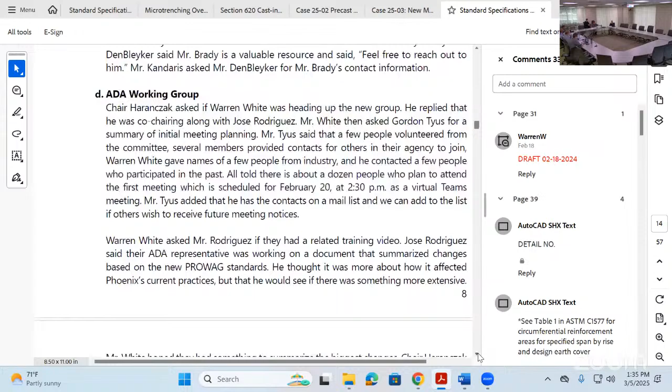All right, do we have any comments from the committee members regarding meeting minutes or any questions? All right, hearing none, I'll entertain a motion to approve the meeting minutes as written. Mr. Chairman, this is Dan Nissen with City of Peoria, and I make a motion to approve the meeting minutes as written. Thank you, Dan, I appreciate that. Can I get a second motion? I'll second the motion. Thank you, Ryan. We have 2 motions. We'll move into a roll call vote.

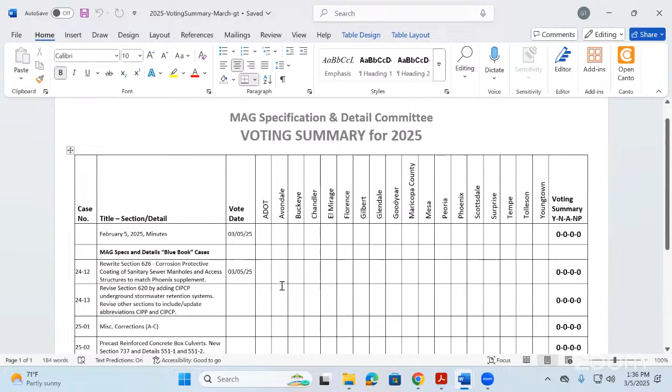Thank you, Chair. Let's go down the line, starting with ADOT. This is Mike Blaker, good afternoon, ADOT present. How do you vote on the minutes? Yes. Avondale? Jimmy, you there yet? Buckeye? Good afternoon, this is Josh Ford, yes. Chandler? Yes. El Mirage? Yes. Thank you, Florence?

Doesn't look like Florence is present. Gilbert? Yes. Glendale? Yes. Goodyear? Maricopa County? Yes. Mesa? Yes. Peoria? Yes. Phoenix? Yes. Thank you, Scottsdale? This is Roy Harrington, yes. Surprise, yes. Tempe, Tolleson, and Youngtown. Is there anyone on who I didn't call or came on later? If not, the motion passes unanimously. Thank you, Gordon.

All right, we're going to move right into items proposed to be heard, cases under consideration. This case carried forward from 2024, case 24-12, revised section 626, corrosion protective coating of sanitary sewer manholes and access structures. This one's brought to us from Phoenix, Matthew was heading this up. Matthew, last I recall, we were going to polish up this last draft, there were a couple minor little changes.

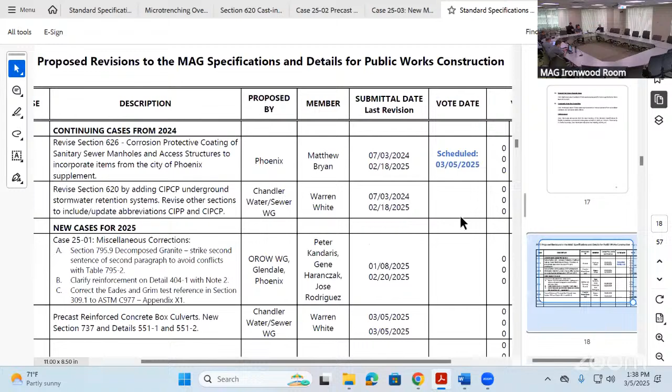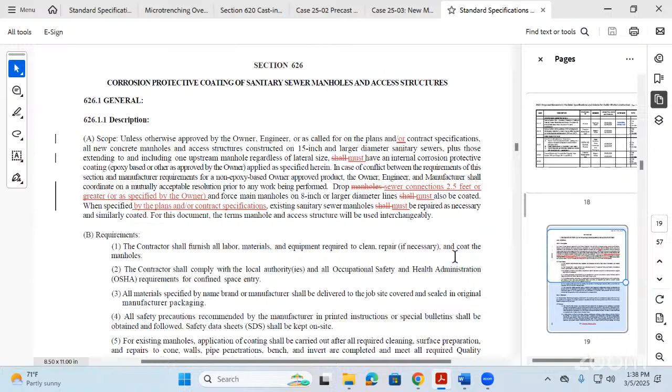I know before you get started, Matthew, I distributed this to my colleagues, and I didn't receive any opposition to it or any negative feedback. So with that, Matthew, can you provide us a quick update on any changes that were made? Good afternoon, Mr. Chairman, we have no changes on our end. I think we're ready to move forward. Okay, so we have the polished, final version ready to put up for vote.

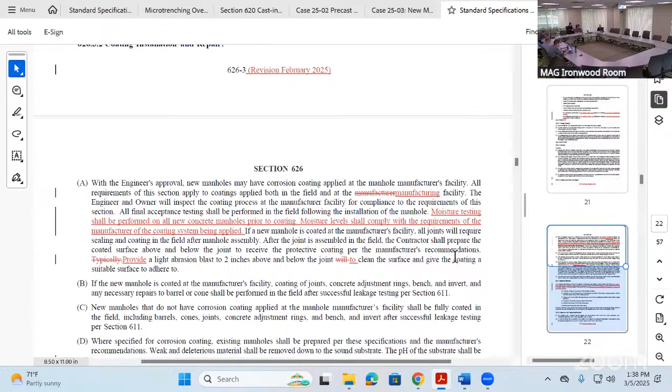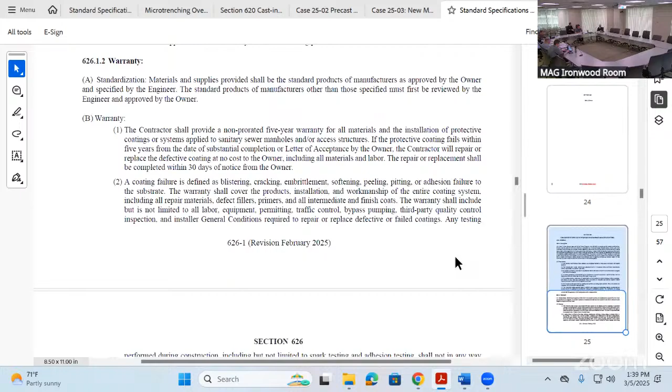That is correct. So with that, is there any committee members that have any questions or comments regarding this case? No questions, not even a good job comment? Well, Matthew, you guys did a great job. City of Phoenix did a great job pulling the resources together and revising this section. I appreciate it. Thank you, comments, Mr. Chairman, you're welcome.

With no comments or questions from the committee members, at this point I'll entertain a motion. This is up for action, so I'll entertain a motion, and Matthew, you're more than welcome to motion for approval.

Do you want me to second that, Mr. Chairman? Well, we don't have a first yet, but since it's your case and you support it, if you want a motion for approval, you're more than welcome to. I'll motion for approval, Mr. Chairman. Thank you, Matthew. Can I get a second motion?

This is Warren, I'll second. Thank you, Warren, appreciate that. With that, we'll move into a vote.

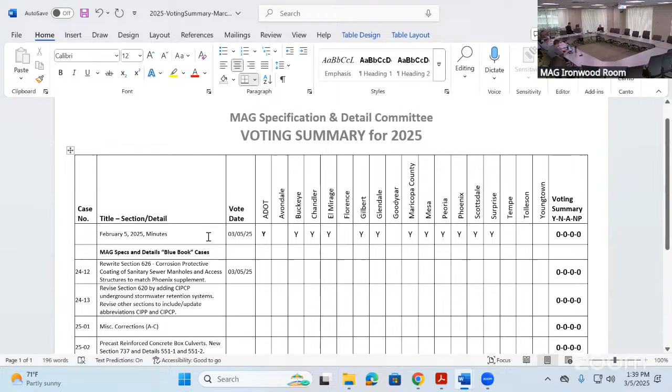Okay, this is case 24-12. Starting with ADOT, yes. Avondale. Buckeye, yes. Was that Buckeye? Yes, that was. Yes. Chandler, yes. El Mirage, yes. Florence. Gilbert, yes. Glendale, yes. Goodyear, Maricopa County, yes. Mesa, yes. Peoria, yes. Phoenix, yes. Scottsdale, yes. Surprise, yes. Thank you. Tempe, Tolleson, Youngtown.

Motion passes unanimously. Thank you, Gordon. Thank everybody. I thank City of Phoenix again for their work and the resources they pulled together. I thank all the committee members that reviewed it and had comments to provide. Once again, this committee is made up of all of us, so I appreciate your guys' input. We'll move into agenda item number 5.

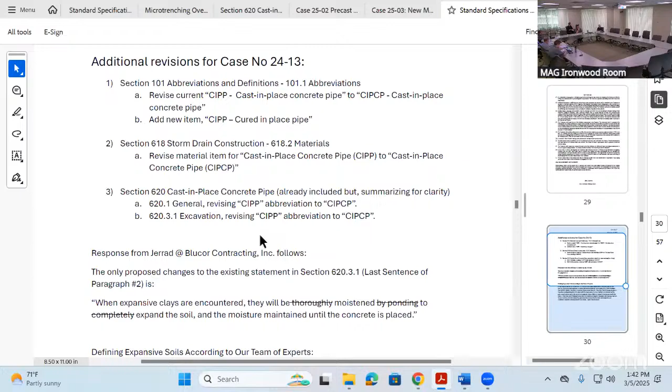It was all really about how best to handle that section regarding excavation and what to do with those expansive soils in that paragraph we've been talking about. So I think we are close in what we've come up with for that additional section, and that's not the latest, we might want to pull up the one on your link on the right. Yeah.

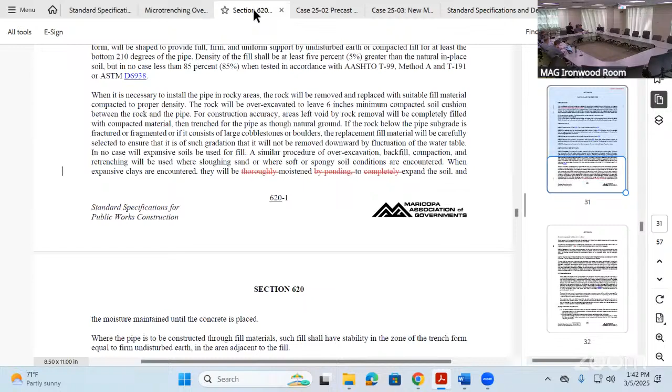So in all cases, we've added that section, or in the first section, general, a geotech investigation is required, for pretty much all cases, to properly assess the soil conditions. So that sets the stage for what to do if you do encounter different types of soil conditions during excavation. So that's new, that one statement where Gordon is showing there.

And then further down, we pretty much removed that sentence regarding wetting the soil, which already occurs below during placement. You're going to want to keep the soil conditions adequately moistened during a concrete pour anyway, so that it doesn't get sucked out anyway. So that's already there, so that's struck. And then that new paragraph,

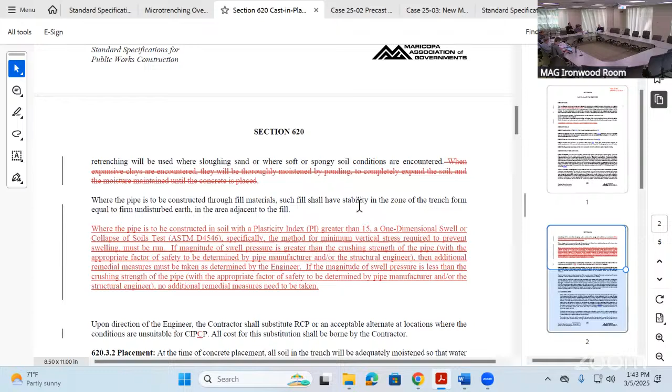being consistent with ASTM and the testing methods about the plasticity index, PI. In one case, if it's greater than 15, then you're going to do that one-dimensional swell test or collapse of soils. And since the ASTM has more than a couple different bullet points there, we've specified exactly what method: it's the minimum vertical stress required to prevent swelling that must be run.

And then if that magnitude of swell is greater than the crushing strength of the pipe, then again, with all the appropriate factors of safety determined by the pipe manufacturer and/or structural engineer, additional remedial measures must be taken, determined by the engineer. Now, that's not really a one-size-fits-all situation out there. So it was talked about whether we could have something as a default, but the feeling of the group was there is not really a one-size-fits-all.

Could be maybe they make a more robust pipe, could be a site-specific situation, maybe they go to RCP. So there's different scenarios there that the team felt like that's the appropriate measure, is then you get back to the engineer, and then they determine what's the best situation for that case. So that's where we're at now with this situation when we encounter the expansive soils.

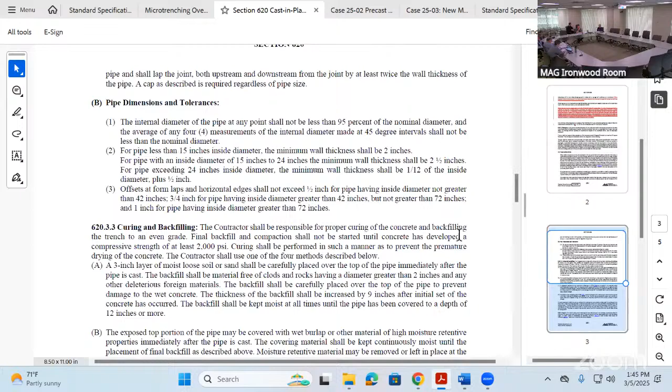Hoping we're close, but that's... Yeah, this was that last minute, the middle revision, so a lot of the committee members obviously hadn't had a chance to... Haven't had it, yeah. So we have opportunity to talk a little more again at the water and sewer. Great, yep, so we can see how close everyone feels.

So this will be brought up with the water and sewer working group again, and then I suggest any of the committee members that are not part of that working group to at least put eyes on this and run through it. Do we have any questions or comments from committee members? Yeah.

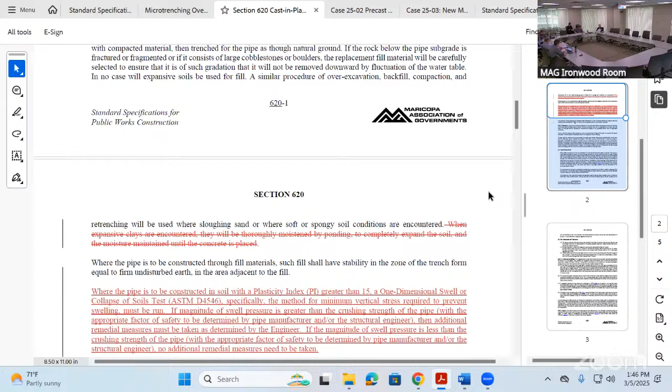Thanks, Mark. Most of the changes here are pretty simple with the abbreviations and acronyms. I'm curious in section 620.3.1, that second paragraph, what prompted the request to change that language? Has there been a certain problem we've identified that made us say we got to change this?

Not that we were aware of, because it's been in place. From last year's discussions, we had different situations where we thought, okay, if you do this, then you go back and excavate 6 to 8 inches and replace and compact. From what I'd heard from Blucor, they have really never done that, the ponding or other methods. So it seemed like that needed to be revisited, and we've had subsequent discussions and some different drafts. This is what has led to that new paragraph.

It seems like it's getting less prescriptive here—instead of saying do exactly this, it's just saying do something. I guess there's got to be a reason why we're implementing the change, and I'm still trying to understand that. Well, beforehand we didn't really specify—if you encounter expansive soils, it just says to do thorough moistening. But now we've given it more specifics: you do your soil testing, if your PI is greater than this, and you're working with the manufacturer and the engineer. So it's given some direction. It's not specific to what to do, because that has to be determined by the structural engineer.

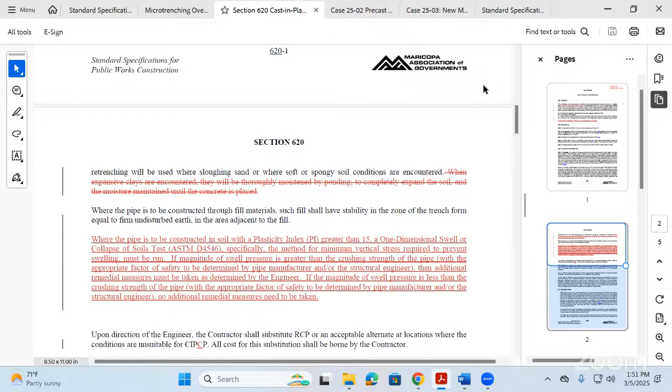Yeah, I think it's something worth looking into. Fair enough, I'll specify and see if we can at least say that, because I thought about that too. As I read it, I saw how the geotech had suggested that sentence. I was wondering about that too. All right, we'll talk more. Thank you, Jose. Any other questions or comments from the committee?

All right, we'll move into agenda item number 6. This is due cases for 2025. Right off the bat is the miscellaneous corrections, case 25-01. This will go all calendar year, and we'll vote on it at the end. There was a new addition for the Eades and Grim soil test.

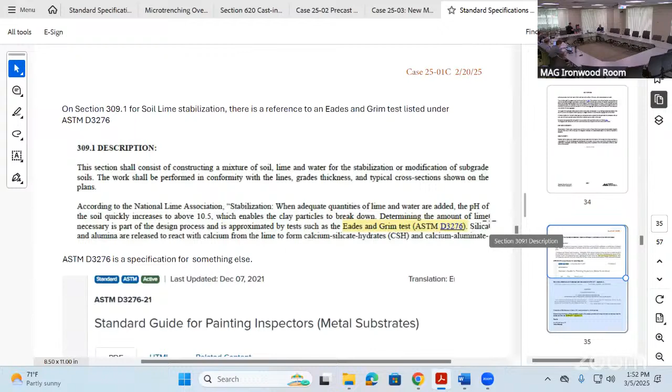I always thought this was a test for ratios of lime and soil for stabilization, but I haven't really dove into this one. I'm not the subject matter expert here. Do we know who brought this case? Warren, I believe this was Jose Brown. Jose, can you give us a little brief background on this Eades and Grim and the correction?

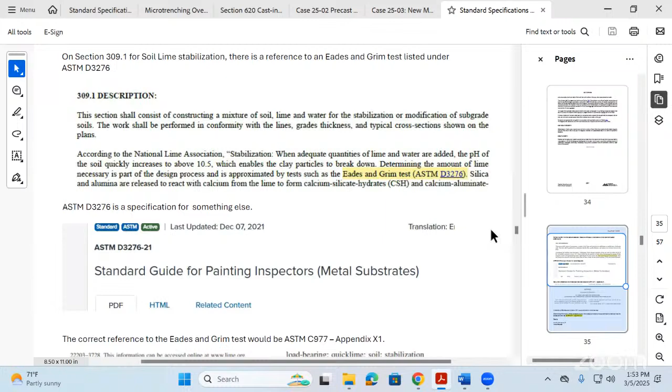Thank you, Mr. Chairman. In reviewing section 309.1 for one project, I was looking into the test methods called out in the specification, and which ASTM we needed to follow to review a mix design for lime stabilization. In looking at that, I realized the ASTM called out in connection with the Eades and Grim test is not correct — that particular ASTM has to do with metal painting inspections. But I was able to find the actual correct reference to the Eades and Grim test method.

And you are correct, Gene, that test method is used to determine the appropriate amount of lime to reach a certain pH level. Okay, yeah, like I said, this is going way back — I've forgotten more than I ever knew about that.

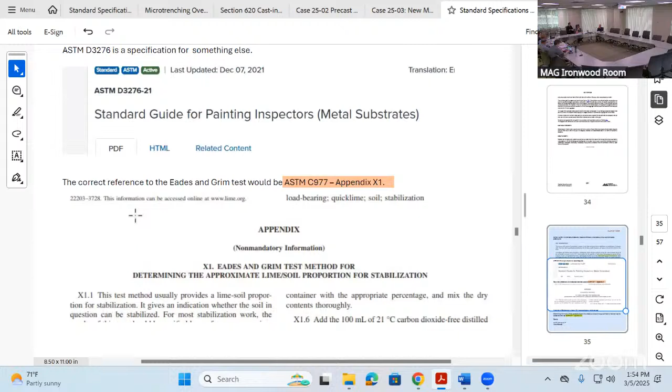I did do a quick search through the Compass Room — have you looked at D6276-19? I didn't, I tried to look at it and nothing else popped out, but which one is that? Take a quick look at 6276-19, and then we'll come back and revisit it. It may not even be applicable, to be honest with you, Jose. Okay, no, I'll take a look at it.

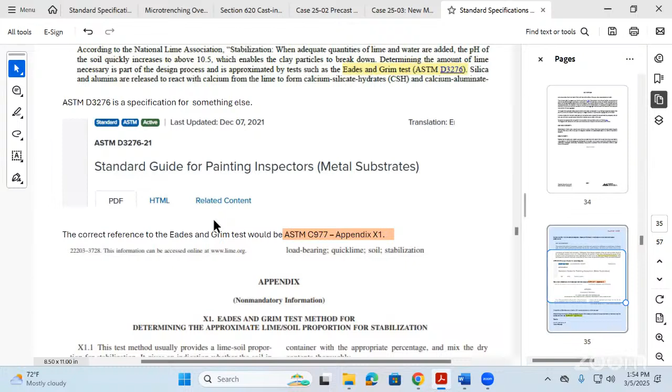I am pretty comfortable with the reference to C977, because that's also called out in section 309, and it just happens to be an appendix of that method. But it's worth investigating other references that may potentially apply. Alright, anybody have any questions or comments on miscellaneous corrections?

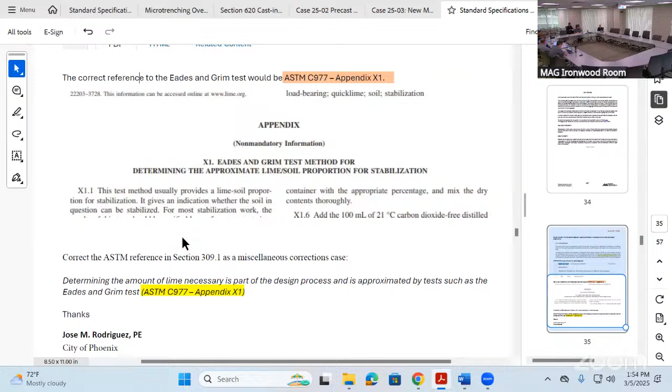All right, we'll move it. Jose will follow up with us on that prior to the next meeting, and we'll get more input on that. Moving on to agenda item number 7, this is case 25-02, precast reinforced concrete box culvert. I believe this is a new case, brought to us on February 18, 2025 by Chandler Warren. You want to give an update on this case?

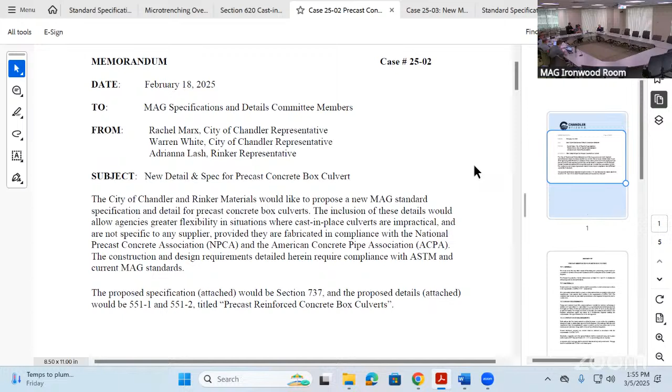Sure, thank you Mr. Chair. We did discuss this at the Water and Sewer Group last month, had a fair amount of comments on that, and through that discussion we've made a couple revisions. I don't know if Adrianna's online, but there's both a new specification, 737, and 2 details for this new concrete box culvert, marrying up the requirements in the ASTM, some ADOT, and MAG, trying to pull together a detail that works and has all the information.

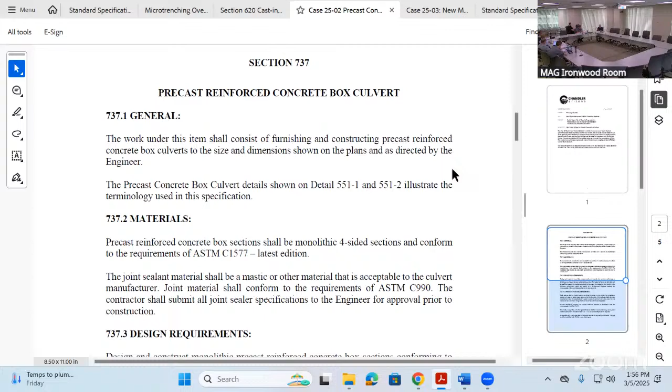Through some of the discussions in the working group, it got into that haunch area on 551-1. Again, this is intended to be universal for any manufacturer if they can meet these requirements. So that haunch area now has a new asterisk indicating below, that came out of working group discussions.

Basically, if haunches with other dimensions are used, see section 12.7 in ASTM for guidance on modified steel areas. We're trying not to have to go to ASTM too much with this, but we're still working through how best to make it universal.

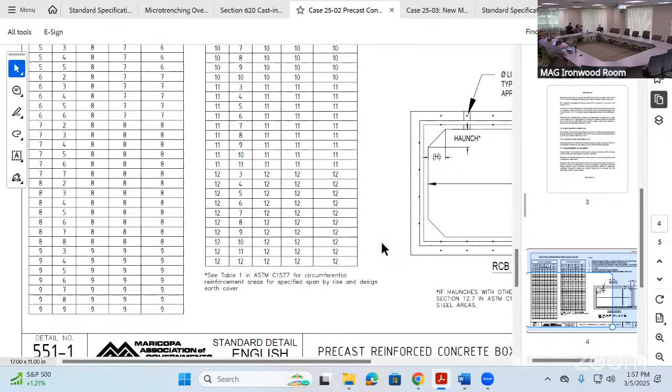Similar with the table on the left for all the different sizes, we've added a statement at the bottom of the table referring back to ASTM regarding reinforcement and earth cover. So this particular table is set, and we're working through, trying to be conservative with this, precast box culvert design options for 0 to 20 foot of fill height.

And then on the next page, there are some additions from the working group. The terminology on the side there, side fill, overfill, is an ASTM term. We debated whether we should try to match the 601 terminology, but it has an ASTM flavor. But construction-wise, we're going to use 601 for the backfill and compaction and types of materials allowable.

We're still basically in the beginning processes here, so we'll continue to work on it in the working group. But any thoughts, questions at this point? For the committee members, we could use some assistance on this. I know Warren Chandler can use some assistance too. So if you guys have any comments or thoughts on it, that would be helpful.

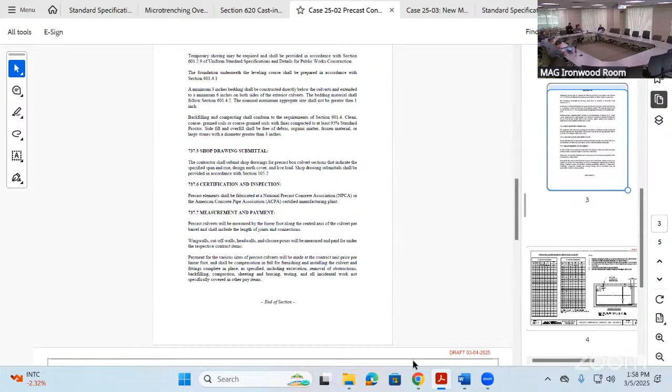Ryan: I guess the first question I have is I noticed in the specification under shop drawing submittals, it mentions that the contractor shall submit the live load. And to me, that's more of a design issue. Is there somewhere in here that says, if this is a precast box culvert, it's got to be structurally designed for a certain load already? Are there different details for different loading conditions, or are they all the same? And if they're all the same, it seems incumbent upon the designer to verify that the applicable live load will work for the detail. And I'm not sure the contractor has access to identifying the live load. I guess that's my first question or comment.

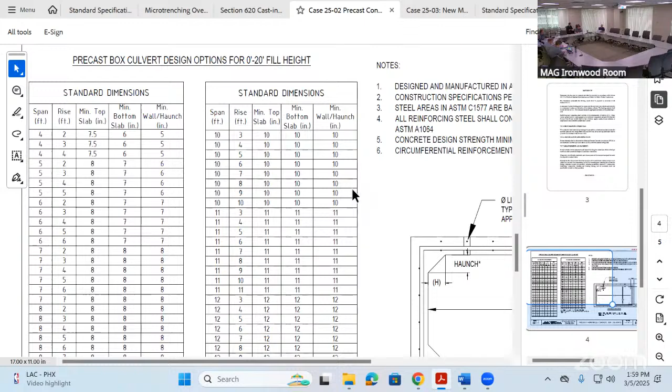That is true, and that's something we're going to have to work through. We're kind of getting into that, and if Adrian is on, we can talk more. But that goes back to that table for trying to come up with something suitable for 0 to 20 foot of fill height that would work. And that would apply to the dead load, right, as opposed to the live load. I think we've got to revisit those types of situations too. So I think somewhere in here, if there's a construction detail, we need to predefine what load conditions apply to the detail as it's structurally designed.

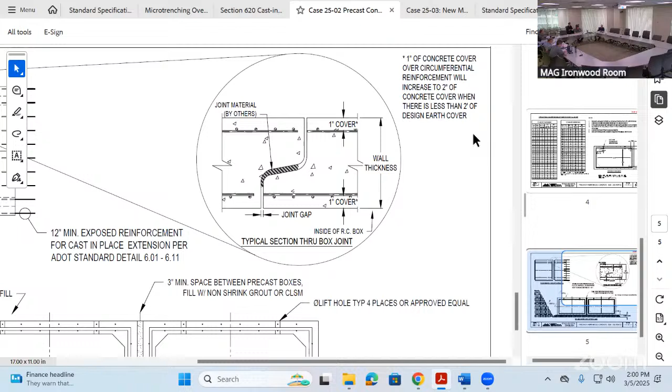And then I had one other comment on detail number 551-2. There's a bubble-up detail for the typical section through the box joint, and I'm noting where it talks about joint material by others. I would not typically have a detail that references by others, because in the end this needs to be a complete detail, not a detail for some manufacturer to manufacture the box culvert. This is for the contractor to install, ready to go and put it in. So 'by others' doesn't mean anything to me. Thank you, good comment.

Adriana, here with Rinker Materials. Two really great comments there, so thank you. We can definitely remove 'by others' on that, because that makes complete sense. The first question you had was in regards to live loads, and on the first sheet of that detail, 551-1, we called out HL93 live load. So just like reinforced concrete pipe, this standard ASTM design is based off of a standard highway loading. So anything less than that would of course be conservative. So HS20 would be encompassed in that.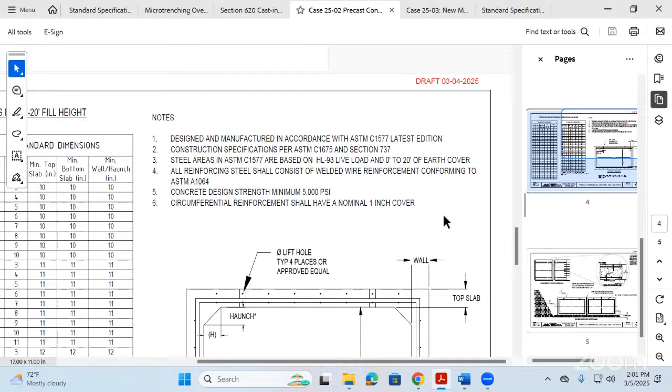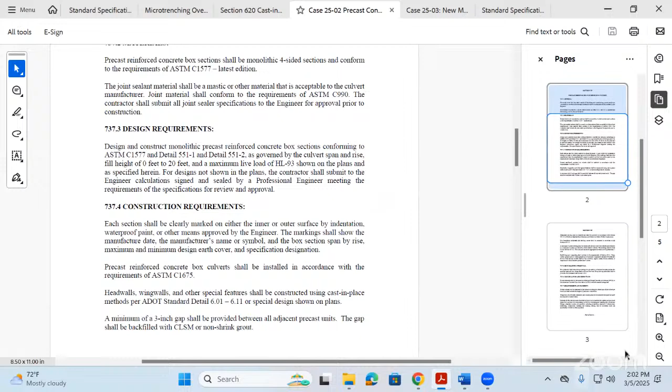So if the designer needs something with a Cooper E80 live load or aircraft loading, they would have to put that on the project plan so the manufacturer knows, and that would be a special design. A professional engineer would have to sign and seal those if it exceeded that standard highway loading. So we mention it there in the note, and also in the written specification. Is that under the 737.3 design requirement, Adriana? Yes, keep going up a little bit - right there in 737.3 design requirements.

Thank you for that. So essentially the designer would need to specify the culvert span and rise based on the hydraulic requirements for the project, and they would have to stay within that 0 foot of earth cover to 20 foot cover range, and of course maximum live load HL93.

Thank you for that clarification, Adriana. Yep.

That goes back to my original comment, which is the designer is responsible for determining if the detail is applicable or not. And if it is, and if it's specified on the plans, then the contractor just needs to provide what's in the detail. There shouldn't be a need for the contractor to start providing load information.

Well, essentially that would come from the manufacturer, because usually the manufacturer will submit all submittal information to the contractor, and the contractor will relay that to the engineer. Now that makes sense, right? It would come from the manufacturer. What's your thoughts?

I see the gears turning. I feel like this specification is a great start, but it's turning more into not a construction specification, it's turning more into a project - it's directing how you're going to run your project, as far as shop drawings and what goes in a shop drawing. In the end, to me, standard details are exactly that: here's the standard detail, build it per the detail. And if you're getting a shop drawing, you're confirming that the shop drawing matches the standard detail. It's kind of redundant at that point.

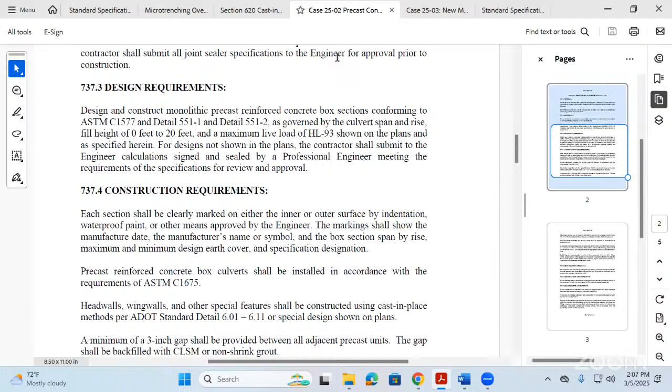Yeah, we decided that we want to stay in line with the MAG. Okay, what was it, section 601, I believe? Yeah, I forwarded this over to our structure branch and they were looking at it and they pointed that out. And also they say that ADOT uses 100% for that. And also, are you aware of the SD 620 for ADOT? Because that's what we're looking at using right now for the ADOT specification detail for precast.

Yes, we are aware of the ADOT standard detail 6.20. Just FYI, that's what McDOT is intending and planning on using at the moment.

That was Marty speaking? That was Marty from McDOT. Yes, thank you, I just wanted to confirm, okay.

Our structure branch, I did give it to them, they did a cursory review since I just gave it to them yesterday. I seen it, and they made a comment about wanting to change it to 95. He's also pointing out you're referencing 601, and why not 6.20 for the ADOT details on that.

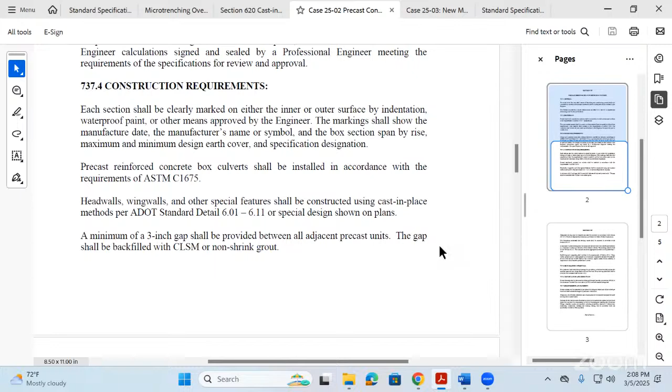I could tell, for the detail. We were talking about the exposed reinforcement for cast in place, but I'll get back with him on that, because he was looking at that and just pointed it out that it's referring to 601 and not 620.

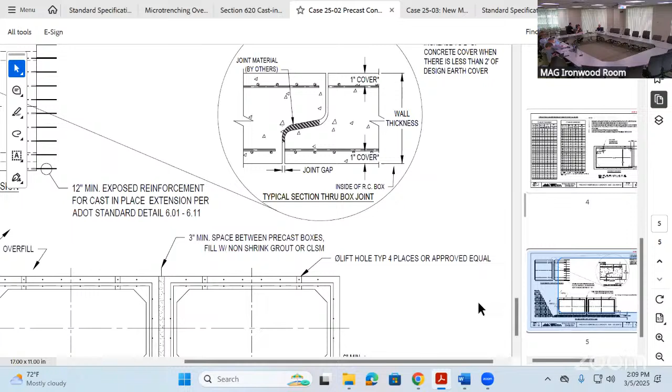Yeah Marty, thank you for putting the time into it. This is a brand new case, so it still has a little ways to go. We are aware it's a new case, so.

Any other committee members have any comments they want to add for this case? Hello, this is Josh Ford with the City of Buckeye. Yes, so looking over this, I have a couple comments, questions.

Looking at 551-1, I see this interior corner chamfer, and in one direction it's labeled haunch, in the other direction it's labeled H. Where are those dimensions at? Those are going to be in the last column all the way to the right, minimum wall slash haunch.

Oh sorry, I'm looking at the version on the website and I see that's been updated in there. Okay yes, yeah I'm looking at the old version too. So Josh, you and I both were kind of leading each other down the wrong path.

So is H the same as haunch? Yeah, I got a little tight there, so I abbreviated it, but we can certainly write that out if that's confusing. Yeah, that might need clarified either in the table or the detail, stating that the H and the haunch are both the same value that we're talking about.

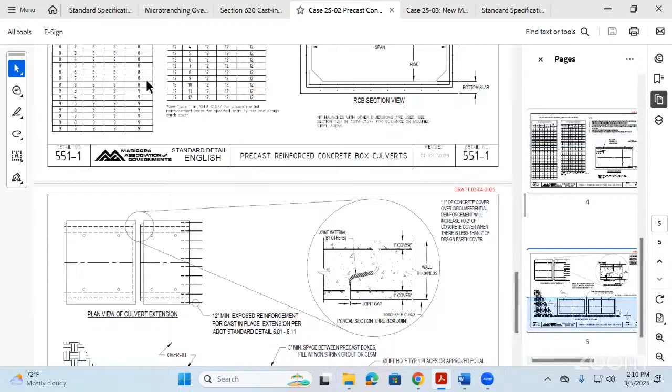Then in 551-2, I see in the spec language it talks about that bedding being extended 6 inches minimum. Now looking at this detail, it's showing 6 inches kind of to a rounded end. Just curious if that should be shown as 6 inches of full continuous 3-inch bedding before it starts rounding off. Just a question there.

And then, speaking of the bedding, looking at the spec detail, it talks about all the things that are included in the payment. I see backfill and excavation, I don't see bedding mentioned. I don't know if we feel like excavation and backfill cover the bedding material, or if bedding should also be thrown into what the payment covers.

Comments, you get both of those? Yep, okay. Then I was going to ask about the 3-inch minimum between and what it was filled with, but I do see in the new detail on the screen it says non-shrink grout or CLSM. Is that like half sack CLSM? Is there a certain spec on that? Do we want to be a little bit more specific?

Yeah, good comments, I noted those so we can discuss that in the working group. CLSM, I don't know if there would be a specific type. It just needs to be a granular material that can self-compact within that 3-inch spacing.

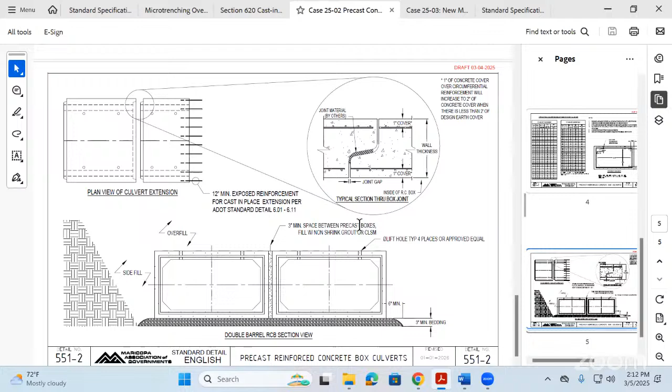I'm curious though, because I'm thinking about what situations we may want to use this, and thinking, well, let's say you had a fairly significant road that you wanted to limit closures on, so maybe something like this would be useful. For your company organization, what type of lengths do you think you would be able to cast them at and transport them?

For us, anything from a 4-foot by 2-foot to, I believe, a 10 by 10 would be an 8-foot joint length, and then at 11 we would convert to a 6-foot joint just because of the weight of the section. Okay, so you're saying like 6 foot.

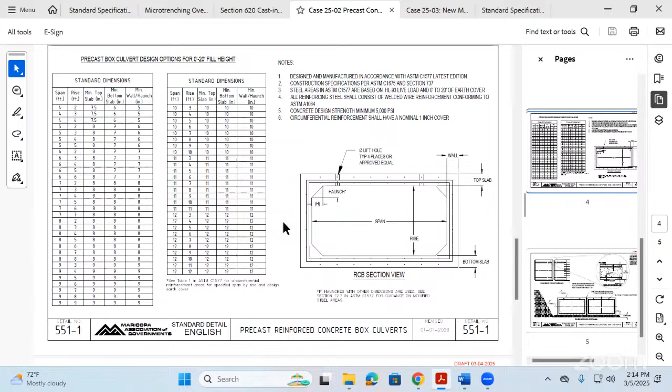So this would come out as a series of pieces. So if you needed to cross a major road, if you're looking at something like maybe an 80-foot or a 100-foot length, this would potentially come out in, I don't know, 15 sections or something, and then you would be pushing them together as shown in the 551-2 detail. Yes, correct. Okay.

All great comments and questions, definitely. That's all I have, thank you. Thank you, thank you for that, Josh. Any other comments from committee members?

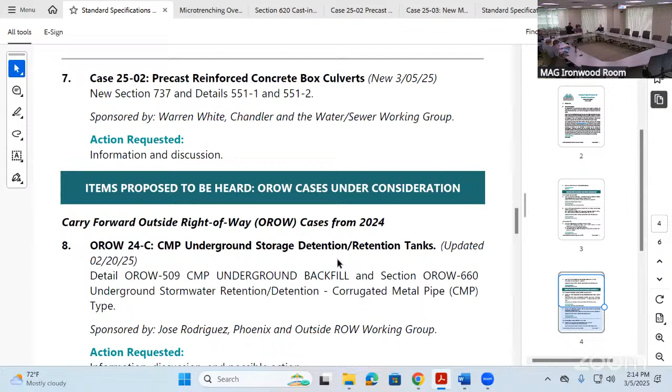These are outside right-of-way cases under consideration. The first one is carried forward from 2024: the corrugated metal pipe underground storage detention retention tanks. Last meeting there was a lot of discussion about crushed rock, maximum size aggregate, engineer of record, and submittals. Jeff had a great comment: why not just require a submittal for the gradation and have the engineer of record approve the submittal? And Josh Ford had a couple questions or clarifications on a note that was in there. I'm sure you got all those.

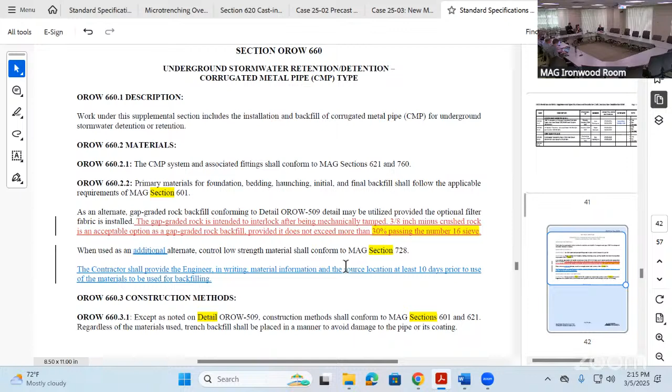This is going to be brought to us by Jose, correct? Yes. Mr. Jose, Chairman, did you take all those comments from the last meeting and put them on paper, or correct them? What do you got?

Yes, so to your point, the first comment that was brought up was a great suggestion, because we did have a lot of discussion. Just to reiterate, the last update we had made included an inclusion and reference to the standard aggregate gradation sizes on the detail to narrow down what is allowed. We also reduced the maximum aggregate size from 3 inches to 1.5 inches in all the gradations from the standard ASTM table that meet that.

We also included in the specifications for this detail that ultimately the contractor needs to provide a submittal for review prior to backfill. This is pretty much the same standard language that is in 601 right now.

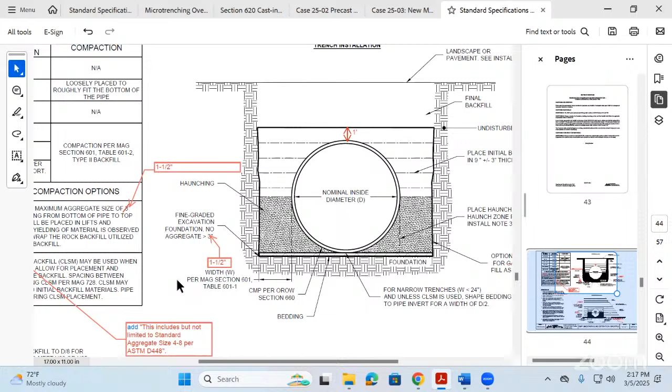In regards to the detail, there were some changes and corrections brought up by committee members last time. We still didn't correct all the right updates to the maximum aggregate size, so we did a lot of corrections to make sure it emphasizes that the maximum aggregate size is 1.5 inches. There was also a comment about making sure we clarified the intent of the initial backfill going 1 foot above the top of pipe, and that dimension was added.

The note, note number 1 under installation note, was also modified to show that 1 foot is to the top of the finished surface. Should that be minimum 1 foot or just 1 foot? It says in no case will the cover be less than 1 foot.

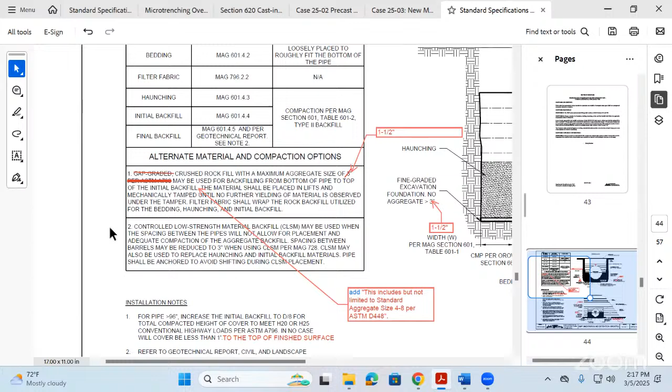It is a minimum. So then on the illustration, on the drawing, right there Gordon, it probably should say minimum 1 foot, just to be consistent with the note. Yes, we can add that. So, 1 foot minimum.

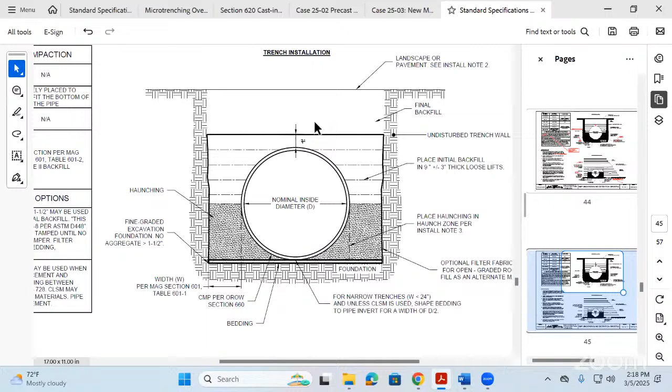All right, are those your updates? Those are all the updates, and I think we've gathered a lot of great input from the committee. I'm not sure if there's any other additional comment, and if not, I'd like to see if we can move this to a vote, or if there's some additional comments, or somebody would like a little bit more time to review this and get back to us.

Let's open it up to discussion with the committee members. Any committee members have any questions or comments regarding this revision or this case from 2024?

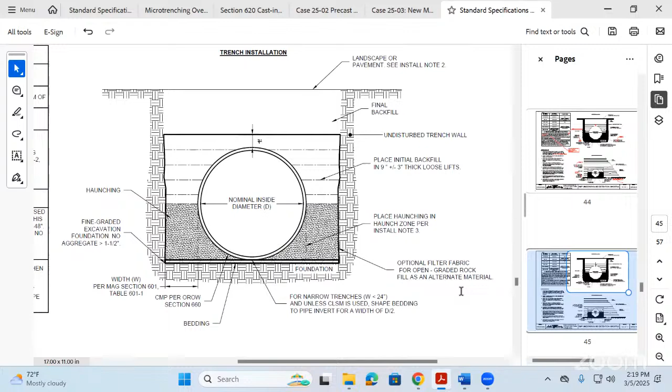Chair, this is Josh Ford, City of Buckeye. I had one comment I think I had last time that it doesn't look like was addressed, not a critical item, I wouldn't say this would preclude moving forward today. In the trench installation detail, there's 2 callouts at the top: one says landscape or pavement, see install note 2, and then there's a final backfill callout below that. I'm looking at the trench installation details of the callouts, just trying to follow along on the screen. In any case, it would seem like install note 2 probably belongs more with the final backfill, since install note 2 refers to geotech report, civil and landscape plans for final backfill. So maybe there's a better place to put that reference to install note 2. But probably not a critical enough comment to stop this moving forward if that's the only item.

No, so the goal with that, Josh, is really to say - and we can definitely try to address the question if this doesn't answer it - the goal is that there may be cases where the tank is installed outside of a pavement area. So the detail, we don't want to be prescriptive of a certain backfill requirement above the initial backfill.

So we don't want to prescribe, for example, a standard 95% compaction if it's not going to be under pavement. Note 2 though is dealing with the final backfill, correct? So that's why I was suggesting the reference to install note 2 probably belongs with the final backfill call out in the detail view, or this trench section view.

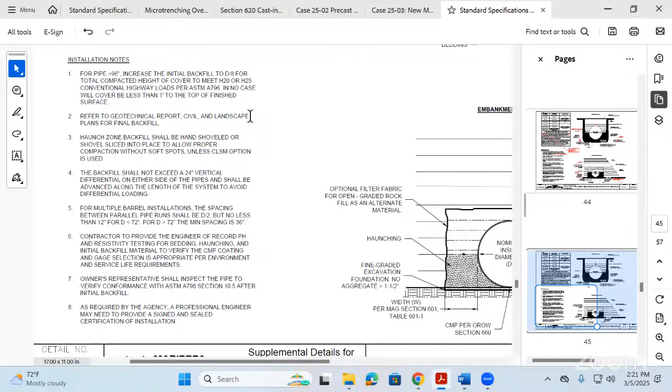Oh, I see your point. Sorry, I failed to see that. What we can do is also make a reference on the detail view and say see install note 2 under final backfill as well. Well, there is a call out there, but I was looking at the section view on top. If you scroll to the very top one, there's a see install note 2 for the landscape. My point was that seems like that would be better associated with the final backfill call. So we can do it on both, right? Because that note 2 refers you to the landscape plans and the geotechnical report, so it applies to potentially both.

Yeah, sure, that's true, so that's what I was saying. We could add an additional see note 2 right next to final backfill with the arrow pointing to the final backfill. But just a minor comment, and if the committee wants to move it forward, I'd be happy to vote for this to go forward even without that being adjusted.

I think what I'm seeing and hearing are two very minor corrections: the minimum 1 foot above top of pipe, just to be consistent with the note, and then the note 2 behind final backfill. If you can make those minor modifications, we can still move forward with the case if the rest of the committee members are willing. Yes, I think as long as there's a vote, we can move forward with those minor revisions.

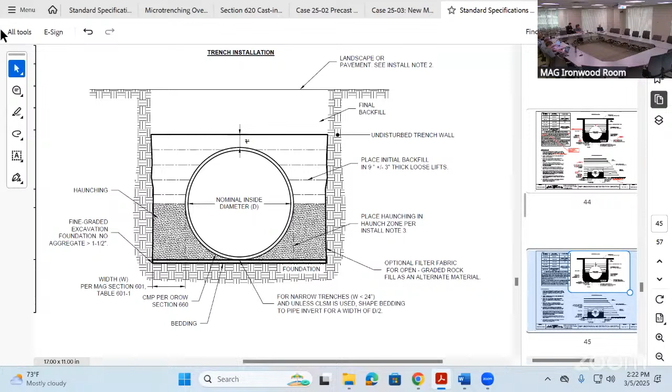Who decides if filter fabric is required? It's only optional unless you're using the open graded rock fill as an alternative material. Optional filter fabric for open graded rock. Yeah, it's in the note, yep.

If it's open graded rock, then is the filter not optional? Because the way it's worded could be confusing, I think. It is for me reading the detail. We can clarify that language and say filter fabric required when using open graded backfill. Yeah, I think we need to state that. Okay.

Any other? Great comment. So that language on the last comment, Jose, is going to look like what? Filter fabric required when using open graded rock fill as an alternative material. Filter fabric required when using open graded rock fill as alternative material.

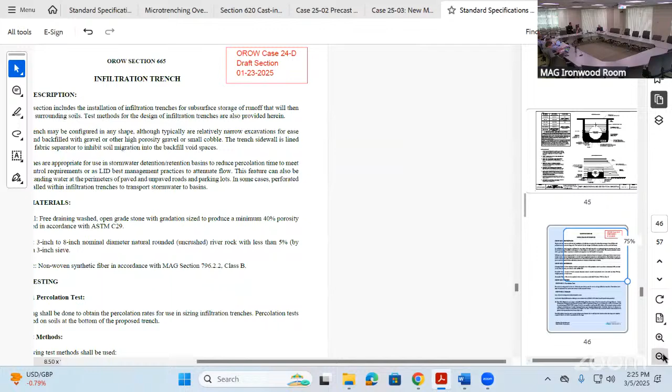One thing, I thought we had requested to put this up for action at today's meeting, and if that was the intent, my apologies. It did not get put up for action, but Gordon informed me that there may have been some revisions that came through that I'm not aware of. Do you want to speak on that, Peter? We don't have a Peter.

Yeah, I think Peter's on vacation this time.

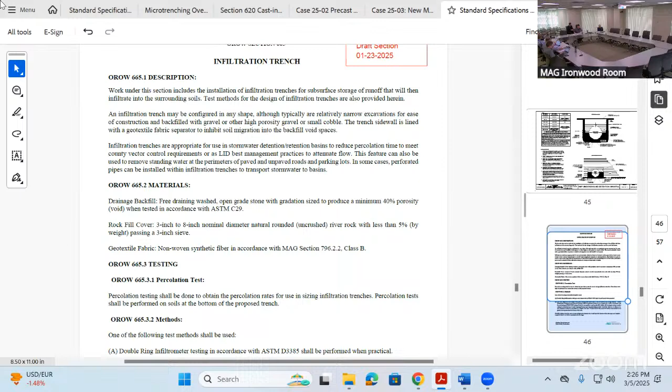The only change I'm aware of is that it was pointed out at the last meeting there was a blob above the detail, and that was removed. There was also a typo in the title, which has been corrected. Now it says infiltration trench. And the black mark above detail option A was removed. So those are the only changes I'm aware of.

All right, well we'll put this up for action at the next meeting. Gordon, if you can do that, that'd be great. Yes, sir.

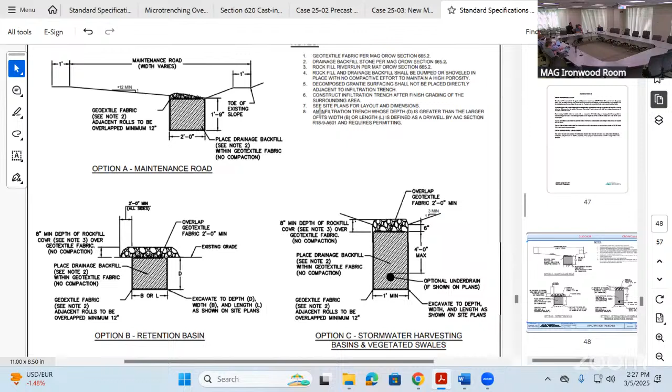Looks like there's a stray line that goes out on the detail, but I think it's right there, down below. Oh, that's okay, yeah. It's just the slope.

Does anybody have any comments or questions regarding this case for the infiltration trenches? Hopefully everybody's had an opportunity to beat it up and send it around. We'll look at voting on this at the next meeting, next month's meeting.

All right, we're going to move into agenda item number 10. This is new outside right-of-way cases for 2025. The first one we have is the stormwater harvesting basins. This is to add a new detail brought to us by Scottsdale. Roy, you want to speak? You want to give some information on this case?

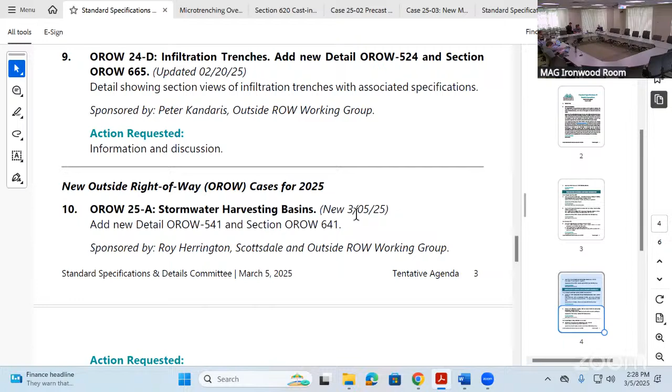Most definitely, thank you Mr. Chair. So this is, as you mentioned, an outside right-of-way case. This has been discussed by the outside right-of-way group for multiple meetings. The last meeting we had, which I think was February, end of February, February 20th, they agreed to move this case forward.

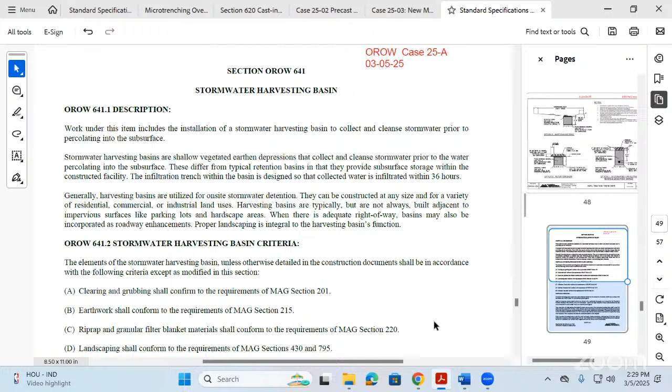So basically the stormwater basin is similar to a retention basin. It's used more for on-site, outside of right-of-way cases, many times adjacent to impervious areas such as parking lots. The intent for the stormwater harvesting basin is to basically collect and cleanse the stormwater before it percolates into the subsurface. This stormwater harvesting basin, and why it's being brought up now, is actually kind of a combination of multiple outside right-of-way group details we've already looked at, some current cases and others that have already been approved.

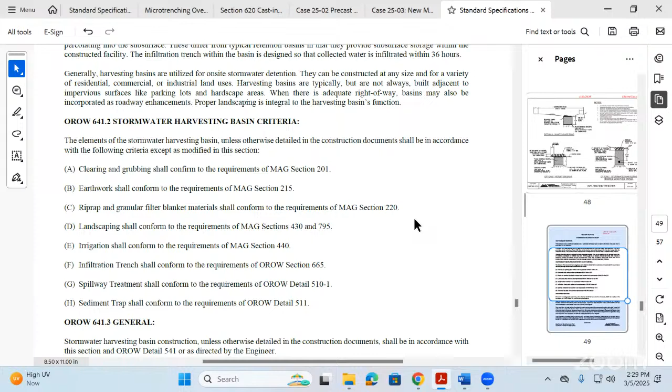So this detail combines the curb openings, the spillway treatments, the sediment traps, the infiltration areas, all as part of the harvesting basin. So the purpose of this spec and detail is to give information on how all those different things work together, and direction on how to construct them. It's more of putting everything together as a system, so to speak.

Yeah, that makes sense, sounds fun. When I hear harvesting, I think you guys are actually extracting water. That was my initial thought. I was looking for some kind of leachate pump or something to bring the water back up so you can use it somewhere else. But in fact, when it's described as harvesting, it's just basically giving it a place to percolate and infiltrate. Is that correct? That is correct, yes.

And so what you have in front of you is detail 541, which is the actual basin. We've got the basin in an isometric view at the lower right-hand corner of the detail, and then a section AA through the basin that shows how the different elements work together. Going from left to right on the section, we've got the curb opening with a possible spillway treatment down to a sediment trap. Then at the bottom of the basin, we've got an infiltration area that was part of the case discussed right before this one, and obviously landscaping associated with the basin as well.

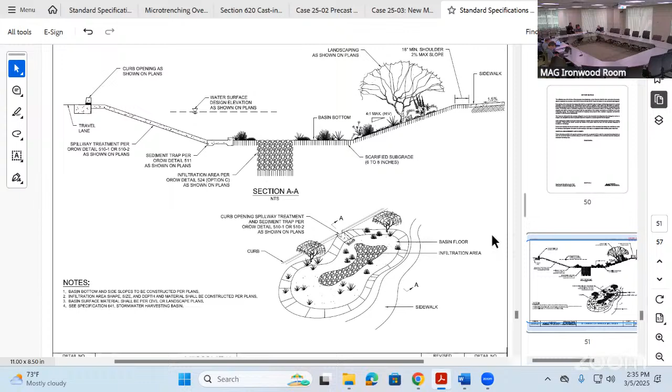Thank you, Josh. Roy, do you have a response to any of those comments, or you just? Certainly, no, Josh, I very much appreciate the comments.

Here at Scottsdale, we've also got an LID handbook. I don't know if it's the same or similar to the one that you've got, but ours does actually show, for a stormwater harvesting basin, the infiltration area as being limited, as opposed to the entire bottom or sides of the retention area.

I just took a quick look on our LID handbook, where we've got the rock mulch or whatever throughout the entire bottom and the side slopes. In our LID manual, it refers to that as a rock bioswale.

So I'm open to one or the other. Either way, I think we've already, as a committee, adopted a rock bioswale, which I think is part of the outside right-of-way group. That is correct - plan and spec already, which I think does show that infiltration area is a much larger part of the entire basin.

So I don't know if we're looking at differences in definitions from one group to another. I would be happy to modify this however the committee would like. But like I said, the LID that we've got shows it as a smaller portion, for what it's worth. And with regards to the depth maximum, I think we can certainly probably do that as well - if the committee, if everybody agrees to the 12-inch max depth, we can certainly add that.

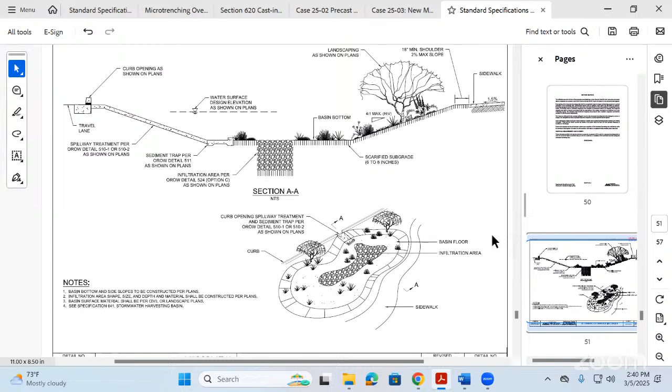That's my understanding, Warren, in the LID manual that we've got, and all the conversations that I've been part of at the working group. Okay, the intent of this was not part and parcel with a dry well. All right, well, that works.

So if you wanted to have a volume, say the depth that you've shown, could you adjust and have a note say the size of the swale or the area of the swale could be designed to handle different volumes and depths? Most certainly, and I guess part of the call out on the detail where it said as shown on plans, where the plan would actually define this, it's almost more of a schematic. You would still have something in the plans that would define whether it's the limits of the infiltration area or the other items, if that makes sense. It does.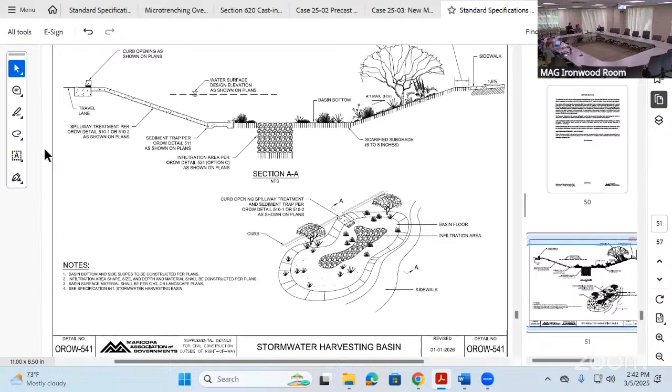Okay, Roy, I was going to say, obviously you'll bring this back to the subcommittee, to the outside of right-of-way working group. Hit all those bullet items that were discussed. I know we have one of our brightest in that group, so hopefully you're full of those. I know Peter, all you guys are very, very educated in this department. So we'll be looking forward to having something back in front of the committee next month. You bet, thank you very much, Mr. Chair. Thank you, Roy.

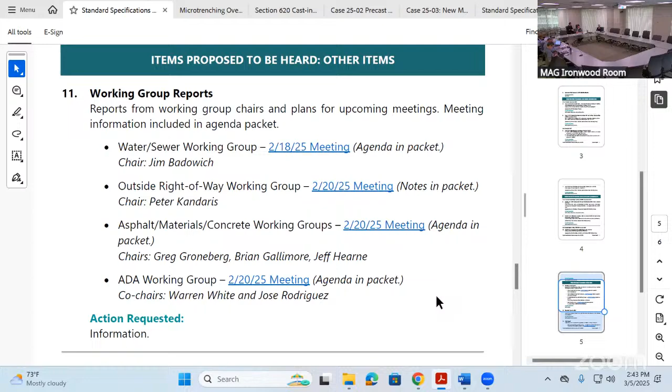So we met on, I can't talk a whole lot, my voice is really hurting. So we met on the 18th of February. Went over the cases we've already covered. I was late, so did you guys vote on the 2412 on corrosion protective coating? Yes, we did, and you were not present. You are correct, but it passed. Okay, good.

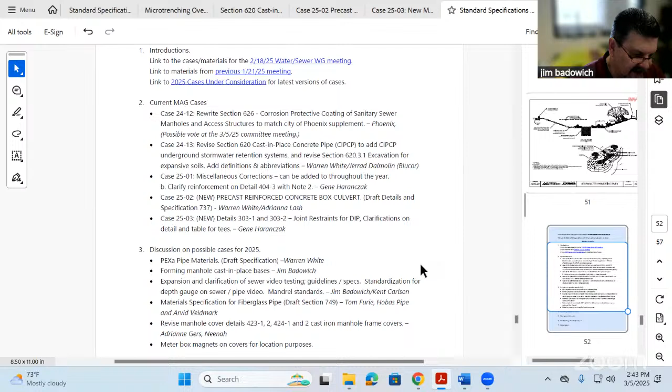So we just had a little bit of discussion on that. It was pretty well packaged, ready to go. And we had a little talk on Warren's case 2413 on the cast-in-place concrete. I think we've got some language we're just trying to formalize on the expansive soils issue. So I think we can wrap that up at our working group meeting next month with Warren and Jerrad from Blucor.

And we had a little bit of discussion on the miscellaneous corrections, as you know, Gene, you were there. So on the 303-1 and the 303-2. Yeah, I can speak a little bit of that under potential cases if you'd like. Okay. And we...

Didn't have much discussion on the PEXa yet, that's coming. Warren's got that case as an alternate service for water services. We had some discussion on the video testing, sewer video testing, standardizing the gauge.

We had an interesting discussion on mandrel. Again, we've got to make a determination on whether we're going to match AASHTO or stick with what MAG says as far as the size of the mandrel. There's a mean, an average, and a base. Do we go with the stricter one? I don't know, we might have some issues with that, because MAG does say the stricter one, but apparently nobody's really doing that from what our research is showing. So...

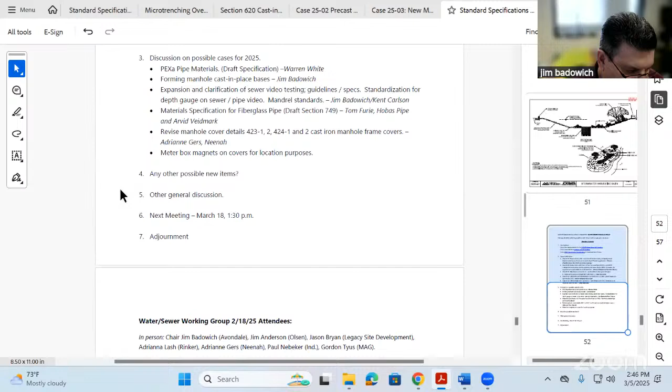That was about it. We've got our next meeting on March 18th. Due to facilities issues, it'll be online only. Is that still correct, Gordon? Yeah, all the meeting rooms are filled here at that time. Okay, so that's fine, we'll just do this. So the next one on the 18th, March, 1:30, will be online only. Show up in person, make sure you bring your laptop. Yes. All right, thanks, Mr. Chairman. All right, thank you, Jim.

All right, outside right-of-way working group. I know Peter, I heard a rumor he's on vacation without us. Is there somebody who would like to cover for an update, or that can cover?

I can just mention that the packet includes some brief notes on some of the things that were discussed. We did have a presentation on the Phoenix Green Stormwater Infrastructure Handbook, and some of the things Phoenix is doing. It's kind of their LID handbook that's geared more towards residents, but it refers to some of their specifications and details. Since some of the ones we're currently working on are the types of things they were referencing, they may reference MAG details in that outside right-of-way handbook in their future updates.

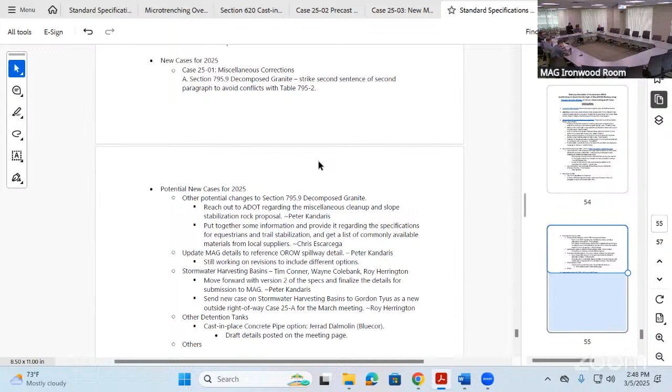I'm not going to talk about the cases we've already gone over, but there was some additional discussion on decomposed granite, as far as using it on slopes, and also maybe some alternate material for horse trails or equestrian trails. Stormwater harvesting basin was already introduced. So I think that pretty much covers what the outside right-of-way group was working on, a lot of the cases we already discussed. Thank you for filling in, Gordon.

All right, moving into the asphalt materials concrete working group. Jeff, are you going to give an update, or Greg? I probably will, Mr. Chairman. Thank you, Greg. You're welcome.

So our meeting was on February 20th. Thank you for pulling that up, Gordon. It's pretty much the three that we continued to work on, looking at the Arizona test methods and what is referenced in MAG coming out of the working group. I have not forwarded this because I just got it yesterday, but it's a pretty extensive list of test methods listed. Originally we were thinking, oh, it's just going to be the asphalt or something along those lines, but it's in a lot of different places. So we've got them identified, we've got the actual equivalent identified, and we'll continue to work on that at the working group.

There's a good chance this case will make it in for next month's meeting. The other one that had the majority of the discussion around is still around section 719 and 326, and rewriting the existing specifications.

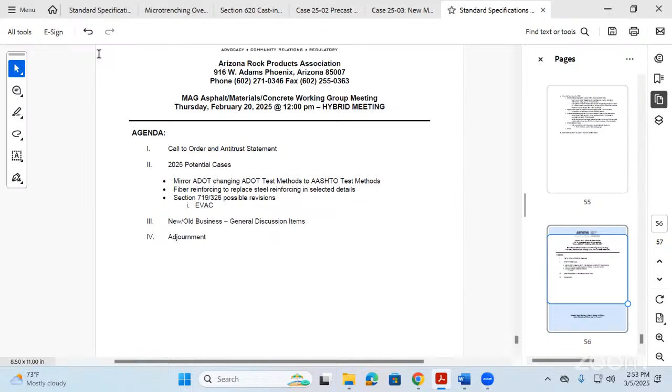You're welcome. Hey Greg, this is Warren. Maybe if you could, I know Gordon's good about sending out the email blast when the meeting is, but if you could give just kind of a quick synopsis, like a scope of what the meeting is. I forwarded that to a few of my folks and they did attend the last one, but I just want to make sure.

So a little bit of it, Warren, is whether it's Chandler, Gilbert, Queen Creek, we're trying to get some sort of clarification. Mesa seems to handle the EVAC spec and apply it a little differently than the rest of the agencies do, meaning not so much the spec, just the use of particular products in certain applications, sometimes not always still in base mixes, let's say, per se. So we're trying to get a consensus on that.

And then B, what should this MAG case look like? Should it strictly follow design and acceptance as EVAC has it written, or should this be more along MAG? Because we've had that feedback in the past from Gilbert, that they were talking, but then for now they're not. So we're just trying to make sure everybody's on the same page. Since MAG's going to probably be in arrears of EVAC every year, we'd like to try and get as much out in front of it as we can.

EVAC has told us, Matt has told us, that he's not making any changes for 2026. So if we mirror it in its entirety, those two should be pretty fluid together going forward. That's still kind of the hope.

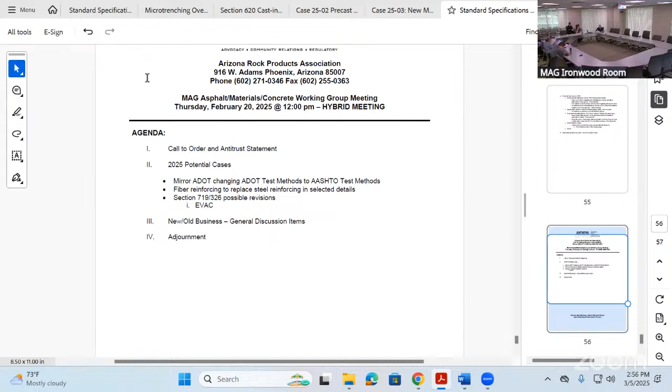ADA working group. We have Warren and Jose. Who's going to be giving an update? I'll kick it off. Jose and I had our first meeting last month and it was very well attended.

Good cross-section of agency representatives, including ADA coordinators, and we had 3 engineering design firms attend. Adrianne from Neenah was there as well. It was helpful to have the product aspects of the truncated domes represented.

So we had a good cross-section for the discussion, and we discussed where we're at now with PROWAG, with the current adoption, where DOT has adopted it. DOJ is still, we're still awaiting the DOJ adoption. DOT is really just for transit, but the goal of this working group is to try to incorporate PROWAG, whether it's officially adopted or not, and be in front of best practice. So we're still going forward with all that.

We really jumped right into the cases we looked at, or draft material, and got into the driveway detail that Jose had submitted, and talked about the potential new detail for the blended transitions. We had a concept, and it seemed like everyone was on board to move forward with developing that detail. And then that detail for applying that 2-foot buffer to curb ramps where you don't want pedestrians to cross — everyone's on board with that.

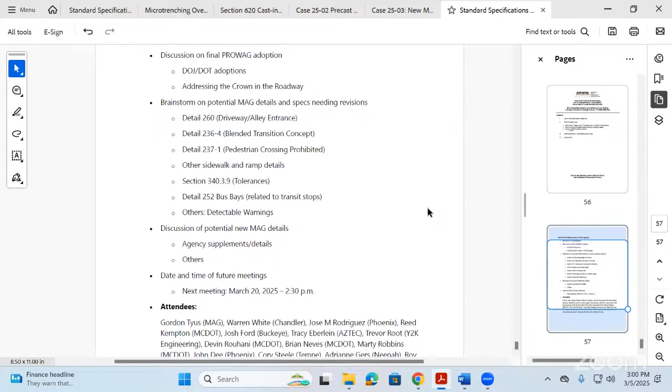There's, like with anything, a lot of different interpretations in PROWAG, so there's definitely a lot more discussion on those directional ramps. You have all this new stuff with the brand new ADA working group, all these topics, items, and potential modifications and revisions sitting in a bowl. Just start sifting through them one at a time, taking the priorities.

We have Brandon Ori from Peoria, who was part of the last working group back in 2016, so he's on board. That's an advantage, definitely good. All right, so that's it on the ADA working group. Thank you, Warren.

Thank you, Jose. Moving into agenda item number 12, potential cases for 2025. Just real quick, detail 303-1 and 303-2 - this is for the joint restraints detail.

I met with the working group on that, myself and US Pipe, and we had some good productive discussion on the direction the detail should go, and got a feel from the working group on what they'd like to see out of it. I think we're all on board with verifying a lot of these restraint lengths, doing some minor revisions to the LNR, or the actual clarification, and providing clarity for the assumptions. That's the big key - you never know what assumptions were taken into consideration when the calculations were performed.

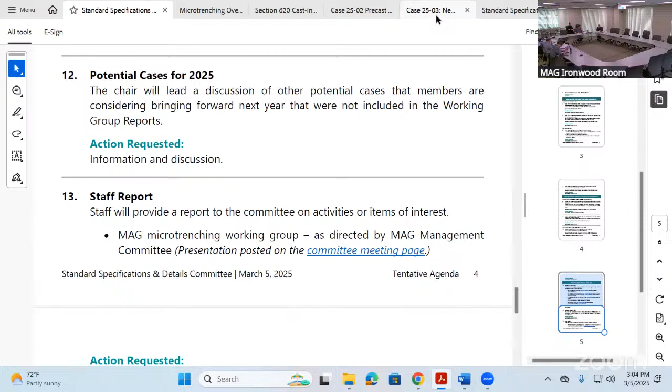This is Warren. I will be sponsoring the PEX-A case. I'd like to discuss that one more time in the working group and then probably bring it back for the March or April meeting. PEX-A does not have an actual case number yet - is that correct, Warren? Not officially, right? I did give you the case number - it's 2503. So you're next in line. Okay, so we'll be seeing something in the near future on that.

All right, moving into agenda item number 13, this is the staff report. Gordon, you want to provide a staff report to the committee, please?

Sure, one item I wanted to mention is that MAG has started a microtrenching working group, and you may have heard about it or been contacted, or have people in your agency that agreed to serve on it. It started at the MAG Management Committee, and at their last meeting they had a presentation provided by a staff member here, Maggie Wong, who is starting this working group. It's a bigger overview of microtrenching in general - the aspects of how it can be implemented in different agencies, how to get fiber to homes for high-speed internet, but also the pros and cons of microtrenching and how it could affect your streets. For our purposes, it may involve specifications and details.

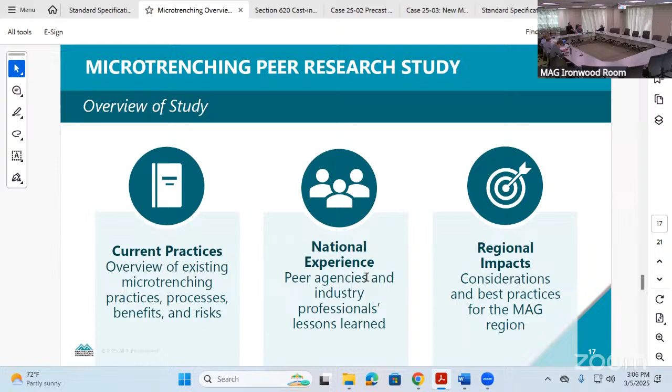There's a few things I wanted to mention that MAG is involved with. First, they're doing a peer research study to see what other regions are doing with microtrenching and how they may have implemented it. There's also the working group already formed - some solicitations have gone out to agencies, and about 10 or so people from different agencies have agreed to serve on it. Some of the things they're looking at are coordination and communication aspects, but one thing we want to focus on is the technical standards, since that's going to be part of it as well. So if you have people serving on that group, please help provide them with any technical information you think is important.

It hasn't started yet, but I think it'll be convening soon. These are some of the things that they're planning to do. So if you have any questions, you can let me know. If you're interested in serving, you can let me know. Maggie Wong, you can see her email address here. If you want to contact her for more information, you can do that as well.

Any questions on that item? Gordon, is the goal of that group to create a draft package of details and specs? No, I don't think they'd be doing that detailed of work. It would be more like determining all of the aspects of what you would need to do to implement microtrenching in your agency. Mesa did a good presentation on that a while ago, and you heard them discuss how they had to deal with coordination, maintenance issues, and also create the specs and details, which they've done. So that may be one of their recommendations, that MAG should have a standard spec and detail we can use region-wide, but I doubt they're going to be doing that themselves - they would probably task this group to do it if that's their recommendation.

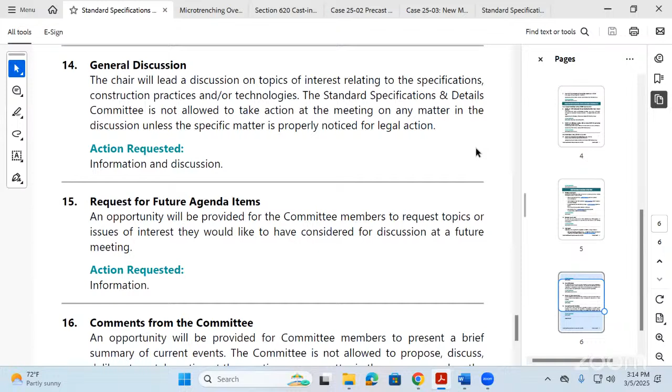Was that a joke? But Marty, is this specific to being adjacent to ADOT's right of way, or just as a whole? I think it was as a whole, but then at the last minute I think we're asking it as it's abutting ADOT right of way. In that case, if you're adjoining or adjacent to that, you'll have to match that at some point. I was asking it in both cases, as a whole and then adjacent to ADOT.

That makes sense, because once ADOT right of way stops and the municipality takes over, do you continue that striping, or do you have to taper it to 6 inches? All right, good question. I'll circle back with my transportation folks and ask that question. Thanks.